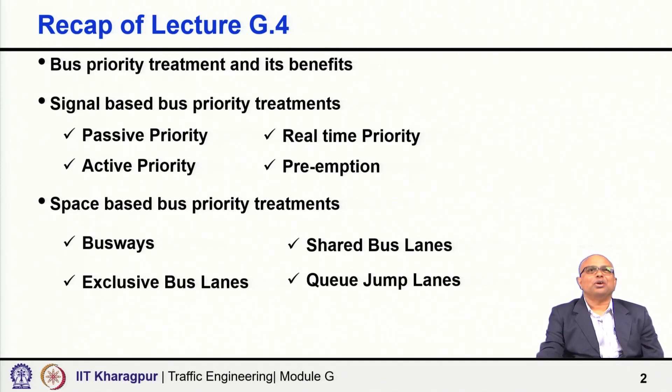In lecture 2, 3 and 4, we discussed about access management, demand management as part of traffic management, and bus priority treatments. This lecture 5 is on components which I have grouped together under emerging traffic management measures.

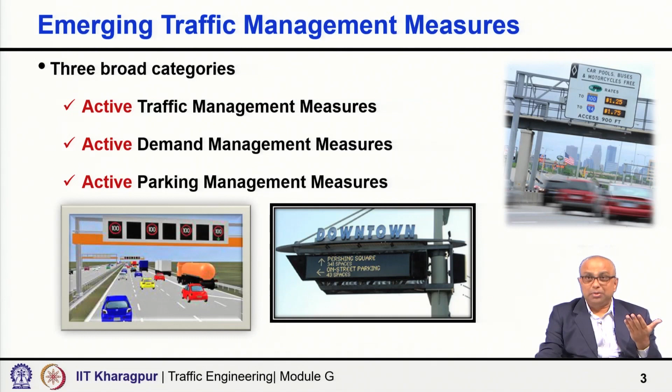This emerging traffic management measures I have categorized into 3 groups: active traffic management measures, active demand management measures, and active parking management measures. The word active indicates that it is on a real time basis based on real inputs, as opposed to the traffic management, demand management, and parking management measures you are already familiar with.

Let us discuss in a little more detail about active traffic management measures, demand management measures, and active parking management measures. First, about active traffic management measures.

Active traffic management measures refer to dynamic management, meaning based on context things will change. It covers dynamic management of recurrent and non-recurrent congestion both. Recurrent congestion means every day during the peak hour the demand is high, therefore congestion is high. Non-recurrent means there is a sudden breakdown of vehicles or a lane is blocked because of a crash, so the capacity is reduced temporarily and congestion occurs.

So dynamic active traffic management measures refer to dynamic management of both recurrent and non-recurrent congestion based on prevailing and predicted traffic conditions. We get the data, we know what the prevailing condition is, and as per the prevailing condition, the management measures are put into practice.

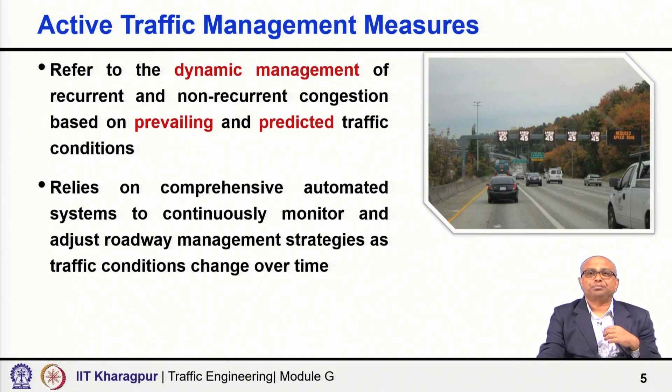There are enormous benefits when we do active traffic management. For example, it may help increase the throughput, overall capacity may be enhanced, safety may be enhanced, trip reliability may increase, and noise and pollution levels may decrease, helping make the system more environment friendly.

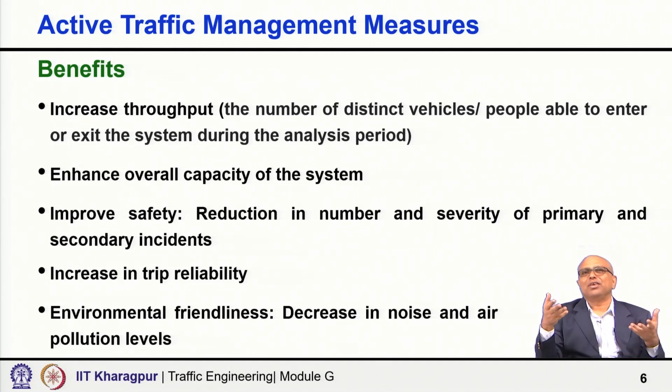There are different strategies: adaptive ramp metering, adaptive traffic signal control, dynamic junction control, dynamic lane reversal, dynamic speed limits, part time shoulder use, queue warning, etc. Let us discuss very briefly about each of these strategies.

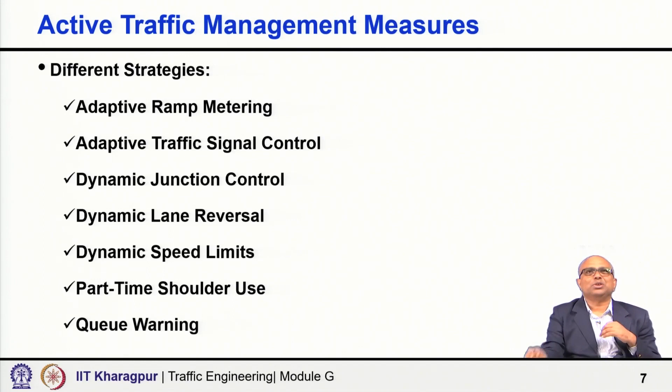First, adaptive ramp metering. We do ramp metering during the peak hour on the main freeway which is carrying a lot of traffic, controlling the entry of vehicles to the freeway as per the condition. Here it is adaptive, so that is ramp metering, where we control the inflow of vehicles to the freeway.

But here the system is adaptive ramp metering, meaning it consists of deploying traffic signals on the ramp, as you are seeing here, to dynamically control the rate of vehicles entering an uninterrupted flow facility, which is a freeway here. This in essence helps make the traffic flow smooth on the freeway and prevents flow breakdown and the onset of congestion.

Why are we doing ramp metering? Sometimes the freeway demand and existing flow could be quite high, and if we allow entry beyond a certain limit, flow breakdown may occur, the traffic state may change to congested or forced flow situation, and a bottleneck may be created. So we want to control this, knowing how much tolerance is available in the existing flow on the freeway, and accordingly we do ramp metering.

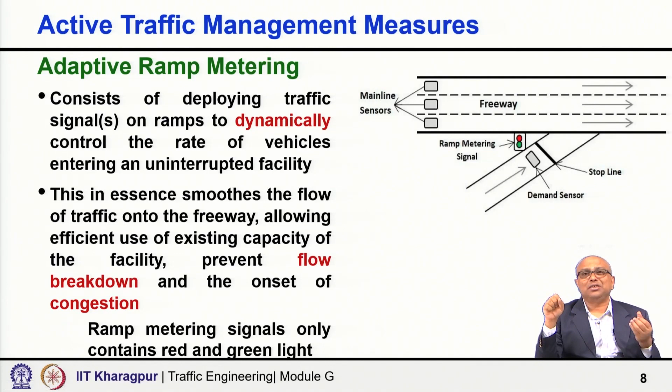Based on the traffic condition, the ramp meter rate is adjusted dynamically, not just on a fixed clock, but according to the state we decide at what rate we will allow vehicles to get into the freeway system from this particular ramp.

Sometimes a queue detecting sensor is also placed on the ramp to monitor the queue, so we know how long the queue is growing. We need to monitor this because a growing queue means the lane will be blocked, which has other impacts, so it may be required to monitor the queue. That is why the sensor is placed.

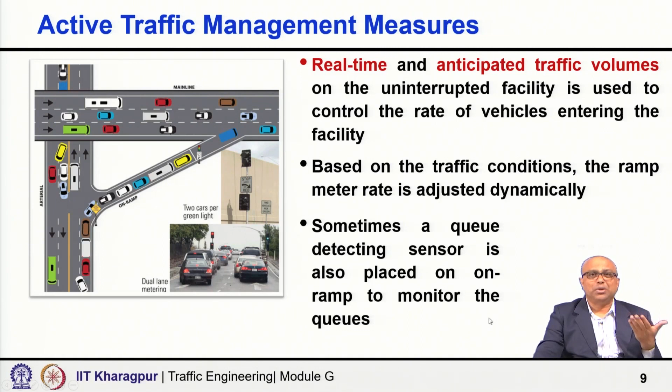Next, the adaptive traffic signal control system. We've already discussed partially actuated and fully actuated controllers. Adaptive traffic signal control continuously monitors arterial traffic conditions and queuing at intersections, and dynamically adjusts the signal timings to optimize one or more operational objectives. These objectives may vary from one context to another: optimizing delay, queue length, number of stops, etc. Whatever the objectives, the idea is continuous monitoring of arterial traffic and queuing, then dynamically adjusting signal timing accordingly.

Adjusting timing parameters, such as phase length, offset, and cycle length, during each cycle is based on anticipating traffic flows near the intersection to optimize operational objectives. So we do it based on actual traffic and also anticipated traffic. Anticipated traffic means, with a continuous data system, many prediction algorithms may work at the back end, conventional as well as AI/ML based algorithms, to give us a forecast, and based on that we can act - not only on the current state but also the anticipated condition.

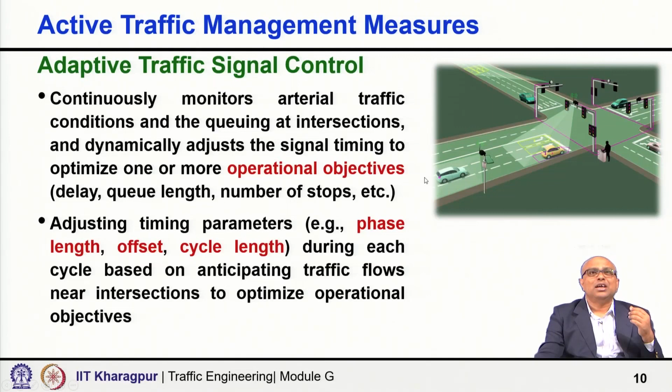Next, dynamic junction control. Here one is the main road and another is like a ramp, though not exactly - if it were a ramp we'd call it dynamic ramp metering or adaptive ramp metering. Dynamic junction control consists of dynamically allocating lane access on the main line and ramp lines. One is the main line, another is the ramp line - the main line is going and the ramp line is also going, and they meet. Often you find a situation where 2 lanes plus 2 lanes merge into 3 lanes.

Now what happens if both lanes are getting heavily loaded traffic? Then a bottleneck will occur and flow breakdown will occur. So what we do is dynamically perform junction control - dynamically allocating lane access on the main line and ramp line.

This is done in interchange areas where high traffic volumes are present and the relative demand on the main line and ramps changes throughout the day. During different times of day, sometimes the ramp volume may be high, sometimes the main line volume coming from upstream may be high, and there we do dynamic junction control - for example, when ramp volumes are relatively light or main line volumes are heavy.

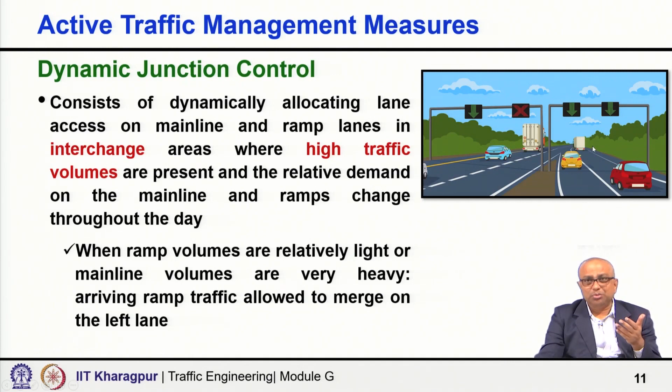So what can we do? We can stop this, cross here, so that these two lanes can merge smoothly and traffic will flow on only one lane. That is one possibility, or we can allow the shoulder lane to be used as an acceleration lane.

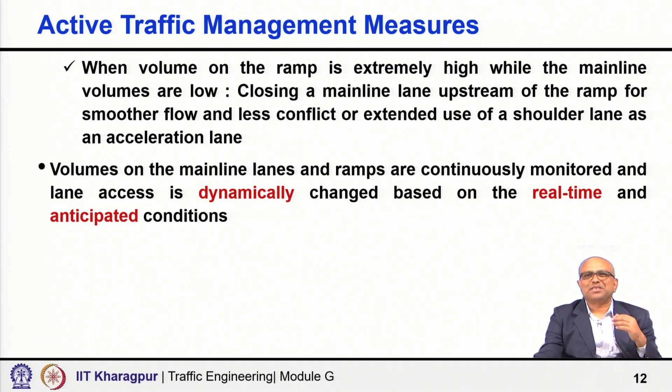Volume on the mainline lanes and ramps is continuously monitored, and lane access is dynamically changed based on real-time and anticipated conditions. So it is not that the same arrangement holds throughout the day - we monitor fluctuations, since sometimes ramp volume may be high, sometimes mainline volume may be high. As per the context and condition, allocation happens. This is what we call dynamic junction control.

Dynamic lane reversal - what is happening? Normally there are 3 lanes in one direction and 3 lanes in the other direction, but suddenly the volume in one direction, maybe eastbound, is more. So now you allow 5 lanes in this direction and only 1 lane in the other direction. This helps where directional flows are highly imbalanced - during morning peak, the majority of vehicles may be going towards the CBD, with very few traveling in the opposite direction.

So wherever the demand is high, you allow more lanes in that direction, but it's not so easy - there are other things to take care of. A normal road with a permanent divider cannot simply be changed. It has to be done with other arrangements, but what we are able to do is change the capacity allocation as per the demand. Conceptually that is fantastic, and that is what is called dynamic lane reversal.

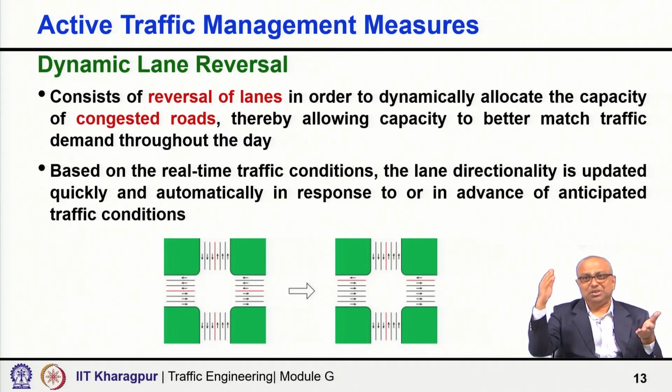Anticipated conditions are used in most cases, because you get data every day like this - there is a huge amount of data available. At the back end, all sorts of algorithms are working, and that gives nice predictions as well. So present condition as well as anticipated traffic condition - based on that also we act. We do not wait for the traffic state to get bad; even before that, we make interventions.

Next, dynamic speed limit. This is very useful, as you know that speed is the major factor contributing to road fatality. Speed really matters. So, these days more and more emphasis is given on speed management as a measure, an instrument for reducing fatality during crashes.

So, it is important to adjust speed limits. Speed limit depends on overall traffic condition, roadway condition, weather condition, and across 24 hours in a day, within a week or within a month, the same speed is not really the safe speed. So there cannot be only one speed. What is safe speed at 10 o'clock in the morning, at 1 or 2 o'clock may be very different, and at 5 o'clock in the morning the safe speed may again be very different, because the traffic conditions, the road environment, the roadside, the control condition, everything is changing.

So dynamic speed limit adjusts speed limits based on real time traffic, roadway and weather conditions, and you can apply this kind of dynamic speed limit to an entire roadway segment or even individual lanes, both ways. Real time and anticipated traffic conditions are used to adjust the speed limit dynamically to meet an agency's goals and objectives.

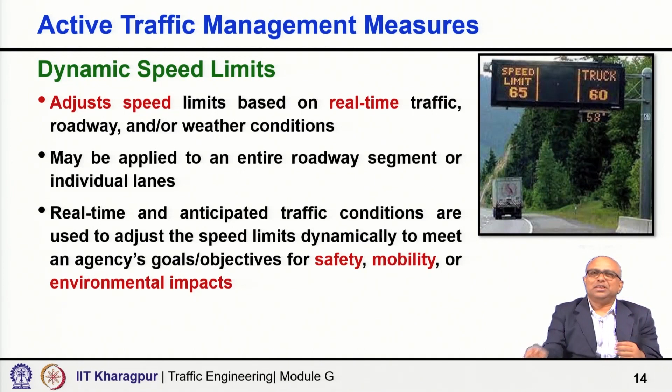For example, the objective could be safety, mobility, or even environmental impact. Speed controls everything - speed influences mobility, speed influences road fatalities, and speed also influences emission or environmental impact. So whatever may be your goal, single or multiple, you look at the present condition or the anticipated condition, and then decide what speed limit you want vehicles to follow, and just display that using the dynamic speed limit arrangement.

So the shoulder normally should not be used as a traffic lane. It is only for if there is a vehicle breakdown or a crash happens, then that vehicle can be shifted immediately to the shoulder, or if there is a breakdown of vehicle, that stalled vehicle could be there. So it is not to be used as a regular traffic lane - that is not really the intention of the shoulder.

Occasional use, but you can sometimes use the shoulder as a traffic lane. So part time shoulder use - not always, only when the situation demands due to some reason or other. It enables the use of shoulder as a travel lane based on congestion levels during peak periods; other times you may not allow it. But as you have seen, 2+2 merging into 3 lanes.

This is the first case of active traffic management example I mentioned. So there you are not allowing one lane - sometimes on the ramp, sometimes even the main line also - one lane you are not allowing, depending on which traffic is dominating at what time. And if both are dominating, you may even allow the shoulder to be used as a regular traffic lane during that time.

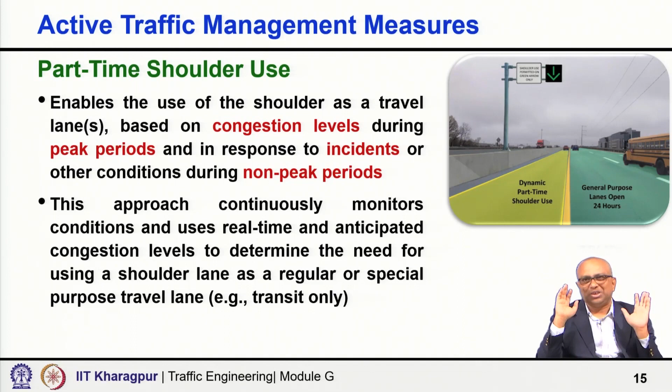Next, queue warning. This is also another active traffic management measure. It involves real time display of warning messages along a roadway to alert motorists that queues or significant slowdowns are ahead.

Vehicles have to slow down because downstream there is congestion, so you alert the driver well in advance. Otherwise they will travel at high speed, not expecting that suddenly they have to slow down, so the possibility of rear end crash will be high. By displaying this information, you bring down the probability of rear end crashes and improve safety. The driver is informed, so you are helping to improve safety.

Traffic conditions in such cases are monitored continuously. Warning messages are dynamic based on the location and severity of the queues and slowdowns.

This kind of system is very useful and frequently used on curves, steep grades, and locations with poor visibility, for example tunnel entrances, where drivers might have limited reaction time to see and respond to a queue ahead. If there is a turn, the driver cannot see completely, and only when it turns can they see there is a long queue. So it may be difficult for the driver to immediately respond and slow down. You inform the driver in advance, for steep grades or other places where visibility is poor or sight distance is restricted.

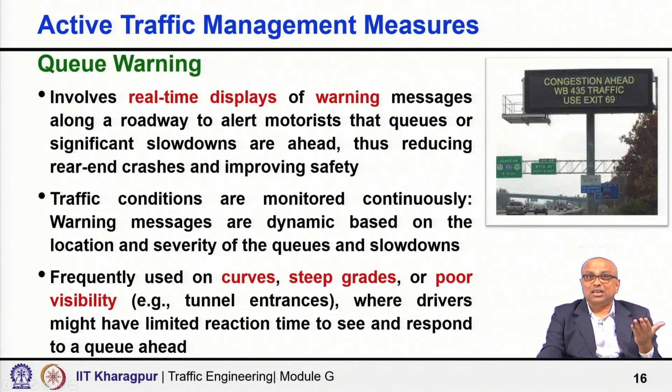Now, going to the next part. Up to this it was active traffic management measures. Now we go to active demand management measures. In such measures, we use information and technology to dynamically manage demand.

Demand management is not new, but what is being done now is dynamic management of the demand. So it is active demand management, which could include redistributing travel to less congested times of the day, peak to non-peak, or routes which are not so congested, or reducing overall vehicle trips by influencing mode, maybe shifting from single occupant vehicle to shared mode or transit.

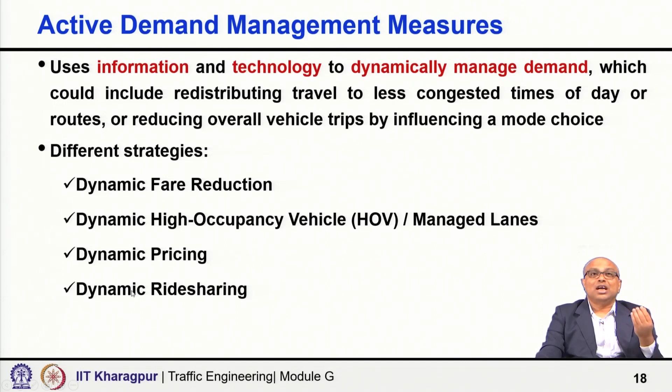There could be different strategies to achieve active demand management: dynamic fare reduction, dynamic HOV or managed lanes, dynamic pricing, dynamic ride sharing. Let us discuss one by one.

Dynamic fare reduction involves reducing the fare for use of a transit system in a particular corridor as congestion and delay on that corridor increases. So as the road becomes more and more congested, you bring down the fare of transit, encouraging more and more people to use it. When the road is not congested, you do not reduce the fare of transit. When it becomes more congested, you reduce the price to make transit more attractive and bring more people to transit rather than encouraging them to use single occupant vehicles or cars.

Such measures will encourage selection of transit mode, which will reduce traffic volume on that road.

Fare changes are communicated in real time through the transit website as well as personalized messages to users, so it should not be a surprise. They know the traffic is increasing, so the fare is going to reduce now. Fares cannot be changed all of a sudden without informing users - they should know the procedure, how and when it changes, and all such kinds of things.

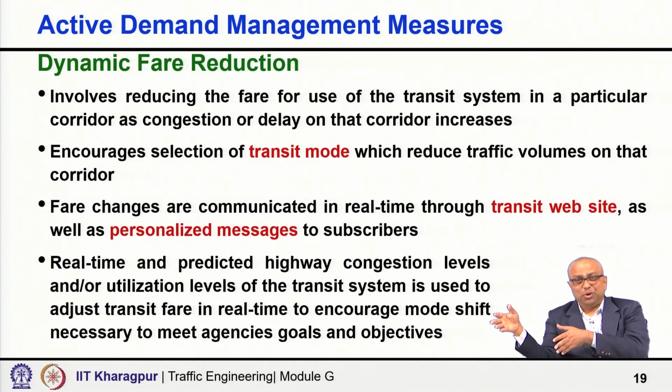Then dynamic high occupancy vehicle lane and managed lane. You already know what is HOV lane, what is managed lane. What is new here is the dynamic word. So it is dynamic HOV and managed lane.

It involves dynamically changing the qualifications for driving in high occupancy vehicle lane. Sometimes it is normal lane, sometimes you convert it to HOV lane, and also decide whether you want to allow only bus or also other vehicle types. So the whole usage will be dynamic in nature, will change over time as per the context, not following the clock, but following the situation as per the situation.

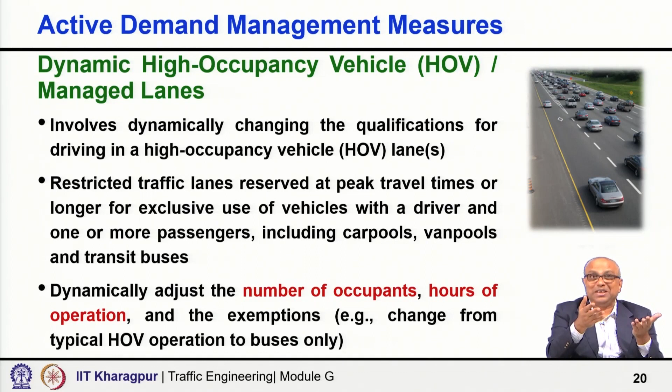So, restricted traffic lanes reserved at peak travel times or longer for exclusive use of vehicles with a driver and maybe one or more passengers, including carpools, van pools and transit buses. Such kind of systems can help you to dynamically adjust the number of occupants, hours of operation and also the exemptions. That means sometimes you may operate it like HOV lane, sometimes you may operate it exclusively for buses only transit, not even other vehicles. So everything as per the traffic state, as per the requirement, and doing it dynamically. So it is an active demand management method.

Dynamic pricing utilizes tolls that dynamically change. Everything is making dynamic change in response to changing congestion level. My primary worry is not to collect money, not to gain money. My worry is to keep the congestion level within permissible limit. So whenever it is required and to whatever extent it is required, I will charge.

So tolls that dynamically change in response to changing congestion levels, as opposed to variable pricing that follows a fixed schedule. In variable pricing also we are changing toll rate over time, but there is a fixed value, the clock is fixed. You know that up to 9 o'clock it is like that, between 9 and 11 it is going to be like that, and again beyond 11 it is going to be like that. It is time clockwise fixed, that is the variable pricing.

In variable pricing also it is not a single toll value, different times have different toll values, but here it is dynamically changing. That means it is not as per the time clock, but as per the congestion state. So whenever the congestion state will demand, I will act, and that is based on the current traffic as well as based on the predictions. Real time and anticipated traffic conditions can be used to adjust the toll rates to achieve agency's goal and objective.

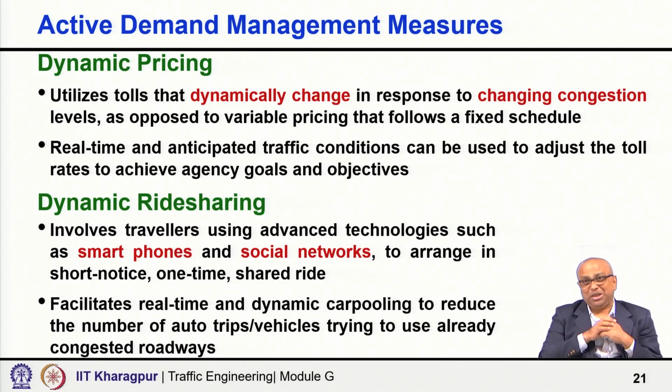So today somehow the traffic is too bad, and because of the dynamic system, it is going to cost you significantly more. If you do ride sharing, you can probably get some benefit. So you get tempted to do the ride sharing and just use your smartphone or social network, saying okay, let's do it, I am ready for a one time shared ride today.

Going to active parking management measures, dynamic management of parking facilities in a region may be done to optimize performance and utilization of those facilities.

Dynamically managing parking can affect travel demand by influencing trip timing choices, mode choices, as well as parking facility choice at the end of the trip, whether on-street or off-street, within the CBD area or a little away from it. The overall goal here is to reduce congestion and improve safety.

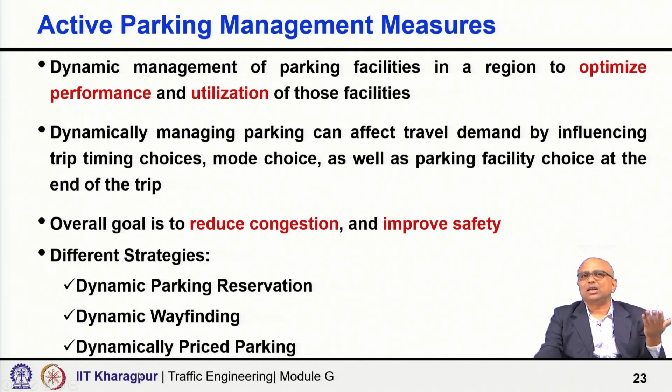So there are different strategies: dynamic parking reservation, dynamic wayfinding, and dynamically priced parking. Let us discuss briefly about each of these methods.

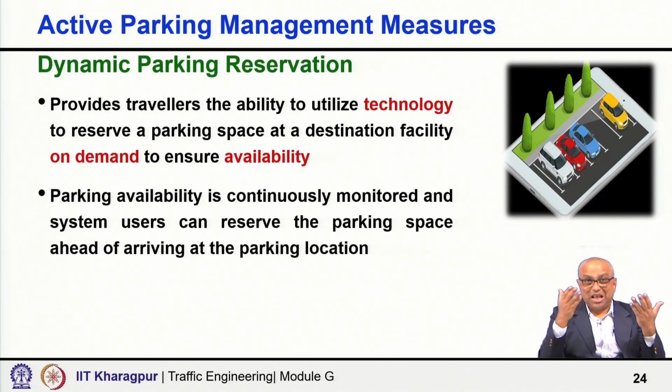Dynamic parking reservation provides an opportunity for travelers to utilize technology to reserve a parking space at a destination facility on demand to ensure availability. That means before I reach there, I am booking my parking lot using technology. When I am trying to book, the information is available on how many slots are free, how many have been booked or already utilized, and so on. I benefit from that information and am also allowed the opportunity to book my parking in advance. So parking availability is continuously monitored, and system users can reserve the parking space ahead of arriving at the location. That is dynamic parking reservation.

Second, dynamic wayfinding. There are multiple places in a CBD area - some underground parking, some surface parking, some a little bit away. So how do I know where parking is available at the present time, and where I should go? That's where dynamic wayfinding comes in.

Dynamic wayfinding helps provide real-time parking related information to travelers about space availability - which parking area, what space is available, how many spaces - so as to optimize the use of parking facilities. I want people to come and utilize the other facilities, and I want to help car users minimize the time spent searching for available parking.

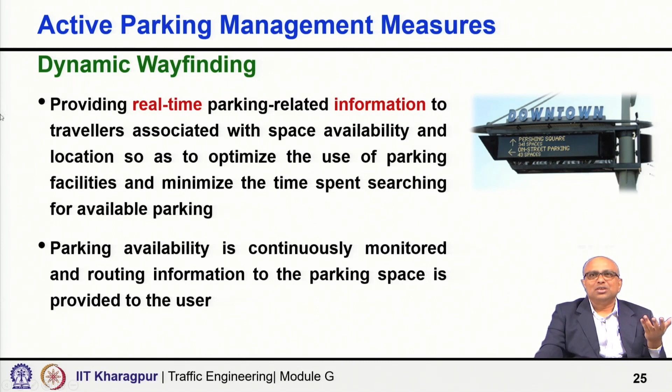So I am displaying information on how many parking lots are available at which locations. This helps make better use of existing parking lots, and also helps car users in need of parking know where they can go and get a spot, optimizing their travel. They need not really go around searching for a parking space. This is one example shown in the figure of how you can display such information.

Dynamic priced parking involves dynamically varying parking fees based on demand and availability to efficiently balance parking supply and demand. It is all about balancing supply and demand in the context of parking - I'll repeat this statement again in the next module probably. So as the demand and supply imbalance occurs, based on that you decide how much the price should be. It is basically decided by the demand and supply in the market.

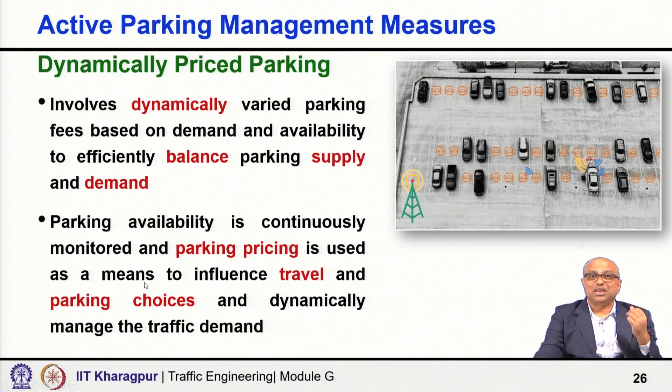Parking availability is continuously monitored, and parking pricing is used as a means to influence travel and parking choices and dynamically manage traffic demand.

So overall, in this lecture we discussed active traffic management measures - various strategies and ways to implement them. We also discussed active demand management measures and active parking management measures. In all these cases, the word 'active' is very important, because it is based on real-time data from sensors, as well as huge amounts of historical data, with algorithms working at the back end - AI/ML based and even conventional algorithms - giving excellent forecasts or predictions. So based on the current state and the forecasts, we do all sorts of active traffic management, active demand management, and active parking management to make better use of existing facilities.